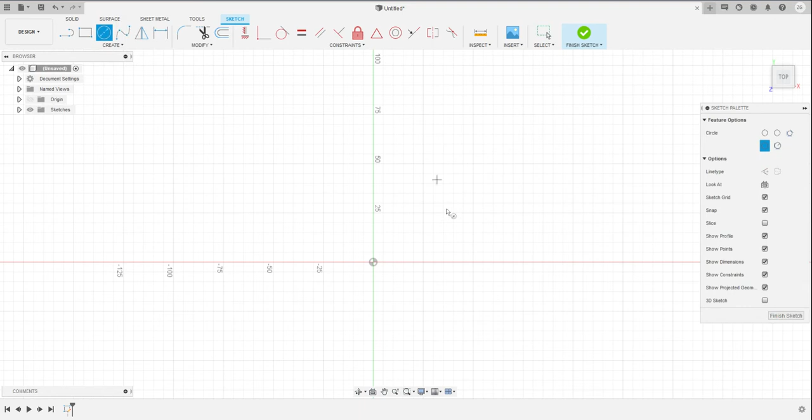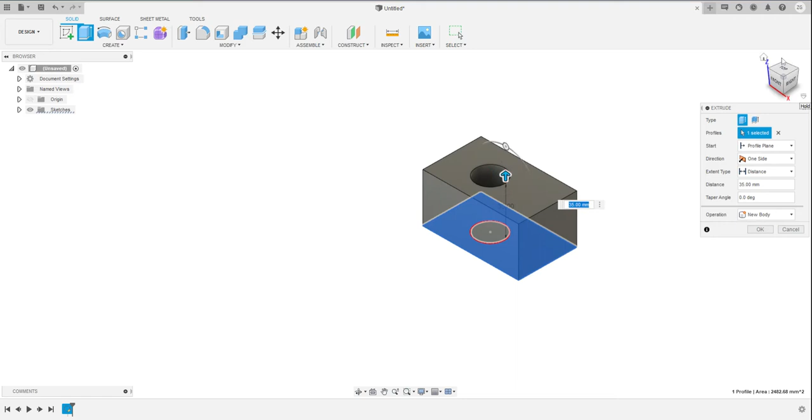So here we're going to make holes in Fusion 360. The first way is what we used on Unit 3 Worksheet 1, Part 1, which is if you make a circle that has the diameter of the hole that you want, and then you have a shape outside of that circle. This can be a rectangle or some other shape. Then when we extrude it, we can extrude just the portion outside of the circle. And so then what that will create is a hole in the middle where that circle was. So that's the first way.

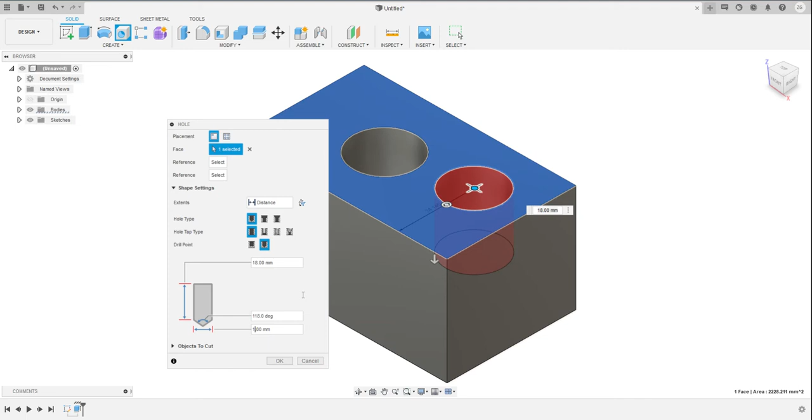Another way that we can create a hole is by using the hole tool, which is in the solid tools. And when we do that, we have to click a location, and then we can adjust both the depth of the hole and the diameter of the hole. So in this case, the diameter is 18. We can change it to 10. Here you can see from the side view that the depth of this hole doesn't go all the way through, but that also shows how you can change the drill point to have an angle.

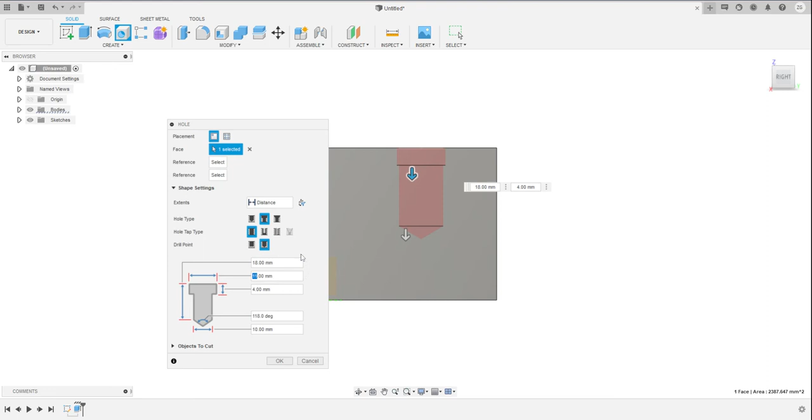You can also change the type at the top to be like a counter bore, which is a little bit easier to see. Let me enlarge this. Okay, and so from the top, what that looks like is a larger hole that goes down to a certain depth, and then a smaller hole that goes further down. So this tool is very useful.

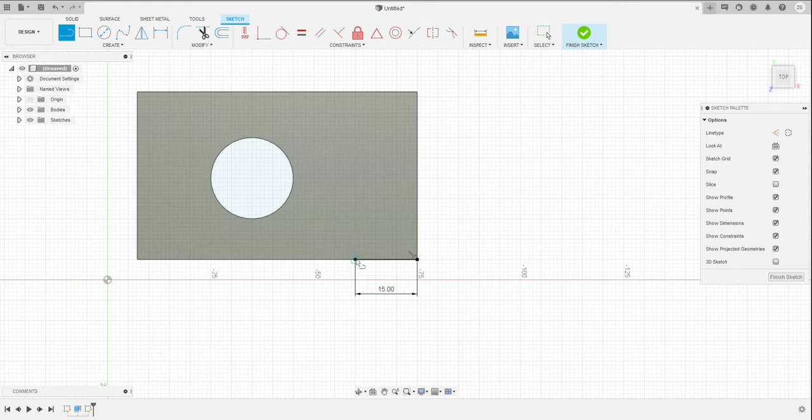There are lots of options, but you also need to kind of pre-plan where the hole is going to be, because this is completely free motion. And so what I would recommend that you do is before you use the hole tool, that you create a sketch, and just using lines, you can plan out where you want your hole to be. So let's say we want this hole to be 15 millimeters from the side and 15 millimeters in.

I'll finish the sketch, and I'm not going to use these lines to extrude anything. What I'm going to do is when I click the hole tool and it asks me to select where I want it to be, I can click that point and it'll select it so I know exactly where the hole is before I start choosing these other options.

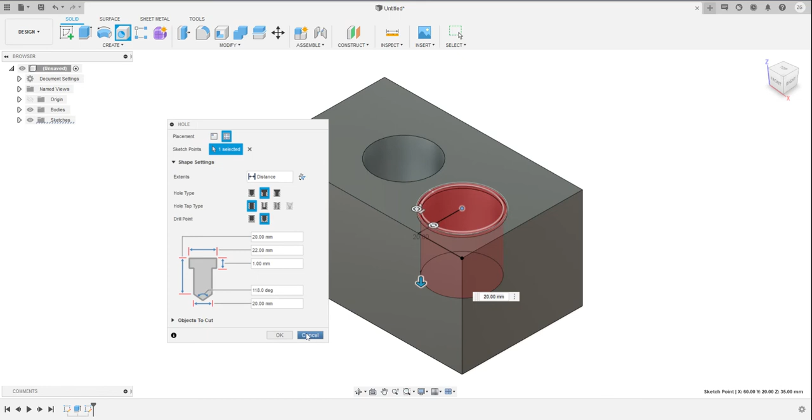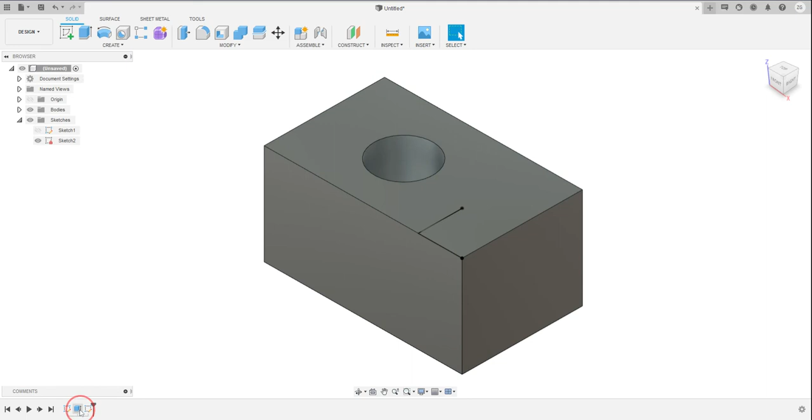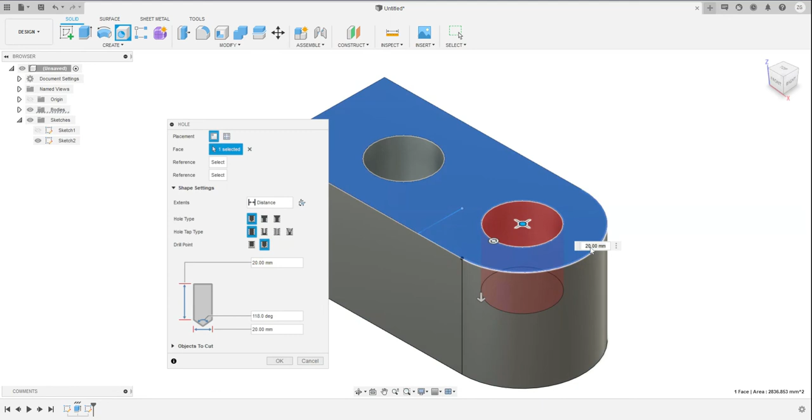The last thing that I'll do is show you that if your object has a curved edge, so let me make a curved edge real quick on my block. There we go. So now that I have this curve over here, if I use the hole tool and I place it, I can tell it to respect this curved edge and make it a concentric circle.

So what that means is if I look from the top here, the center of this hole is the center of this arc as well. And so if you have curved geometry, then you can use that without having to use the lines to set where you want the location of the hole.